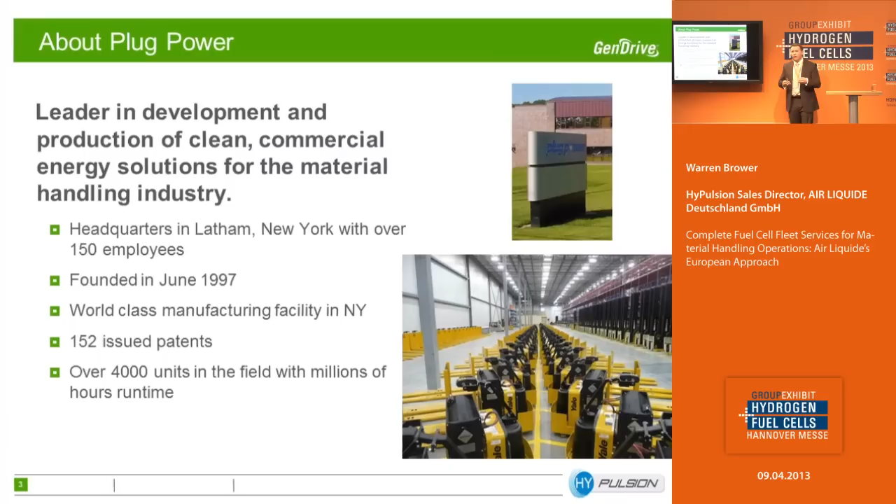Also, I want to make note, and I'm going to be stressing this throughout this presentation, and hopefully this is going to create some dialogue with us after the fact. But the products that I'm going to be talking about are not research and development products. And we've heard a lot about material handling, fuel cells within material handling, hydrogen to work in material handling field. But I'm going to be talking about actual commercial products that are in use. And there are over 4,000 of these products in use every single day with some of the largest companies in the world. And we've collected over 15 million operating hours on these products in the last couple of years. So what we're going to be talking about is actual products being used every day and the benefits that they bring to the customer base.

Air Liquide, again, most of you already know, in 2012, revenues just north of 15 billion euro. They're present in over 80 countries, over 50,000 employees. And their focus has been, as again, most of you know, and I'm not going to go into great detail on this, and please invite you to go to their booth at C56 and 58 to be able to speak to them a little bit more about this. But their focus in technology over the last couple of years and growing specific market segments has led them into this joint venture to work with Plug Power.

While in the U.S. and while working with Plug Power, I worked very closely with Air Liquide on several installations in large companies. So in March of last year, the two companies decided to come together, signed into existence HyPulsion, led by Luc Vendeval, who is the managing director. It's part of the Air Liquide group. Myself and Adrian Corliss came by way of the U.S.

with Plug Power on assignment over the next couple of years to get the joint venture established, as well as work with the lift truck manufacturers, the OEMs, understand the applications here. And over the past year, we've done a lot of the business development in and throughout Europe to understand exactly where the market segments are, where this product is going to work, how we can CE certify the products that are in existence, bring them to Europe, and start adding value to the operations here in Europe.

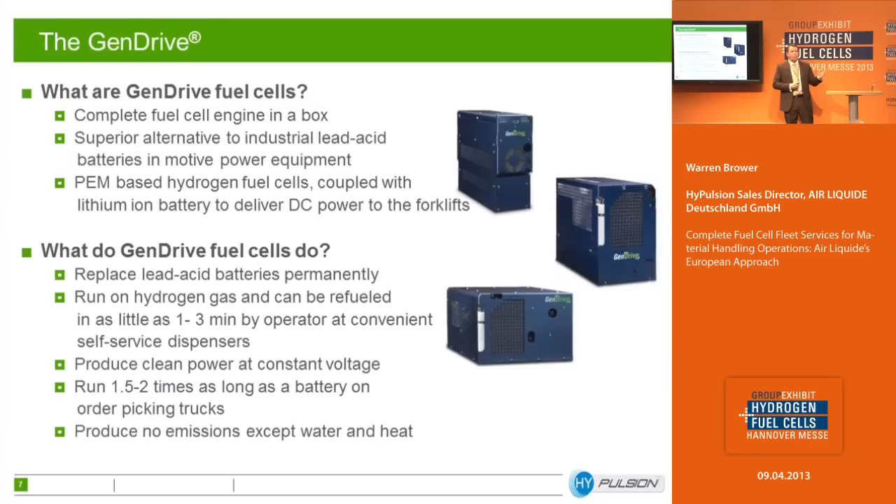They can be refueled, as most people already know and has been discussed in other forums, in as little as 1 minute, maximum of 3 minutes. This reduces a 10 to 20 minute battery swap and allows a customer to recapture the time and the labor associated with the handling of these batteries. The product itself, in many cases, can run 1.5, almost 2 times as long as an average lead acid battery, and has twice the life expectancy.

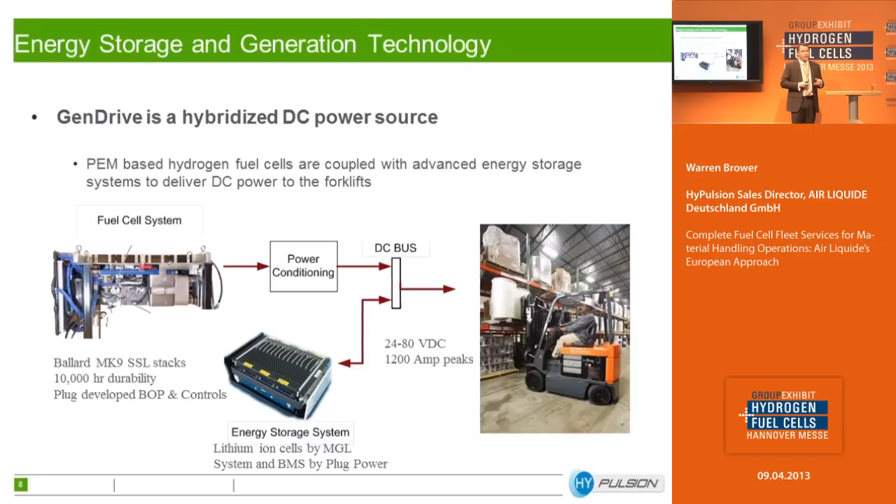Our GenDrive is a hybridized DC power source. So we use a Ballard fuel stack currently within our product, along with a lithium-ion power source or energy storage system. The reason why we do this is because it helps to maximize the output and performance of our product, because we work in very dynamic applications. But secondly, it also helps to dampen the overall load on each of the major components, so the life expectancy of these components is elongated. So you get the benefit of the power, and with the lithium-ion, you have a source to absorb any residual energy that comes back through the system, as well as make sure that the life expectancy of these components is elongated.

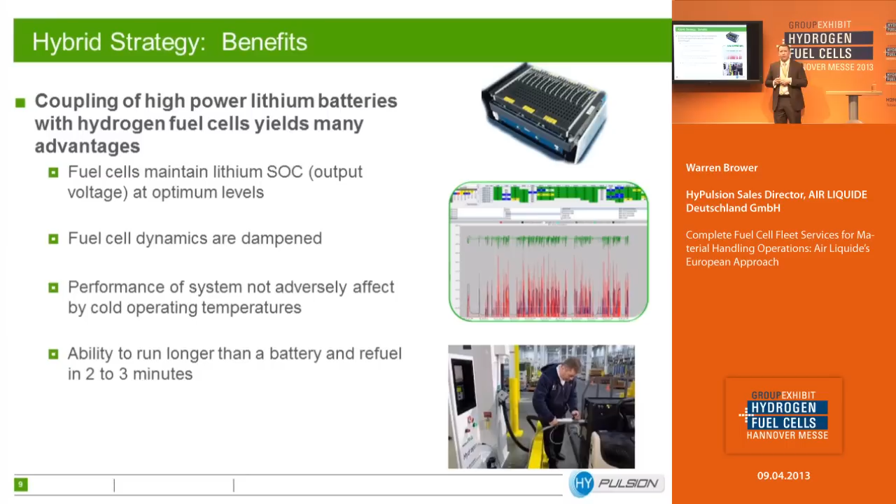We have a 2-system platform approach, a high power platform and a low power platform. Now the difference between them is there are many different trucks. If you are not familiar with material handling, it's too long of a topic to talk about today, but there are large counterbalance type products used in specific applications, narrow aisle reach trucks that can reach 30, 40 feet in the air. You have low-level order picking trucks, tugging applications, a wide variety.

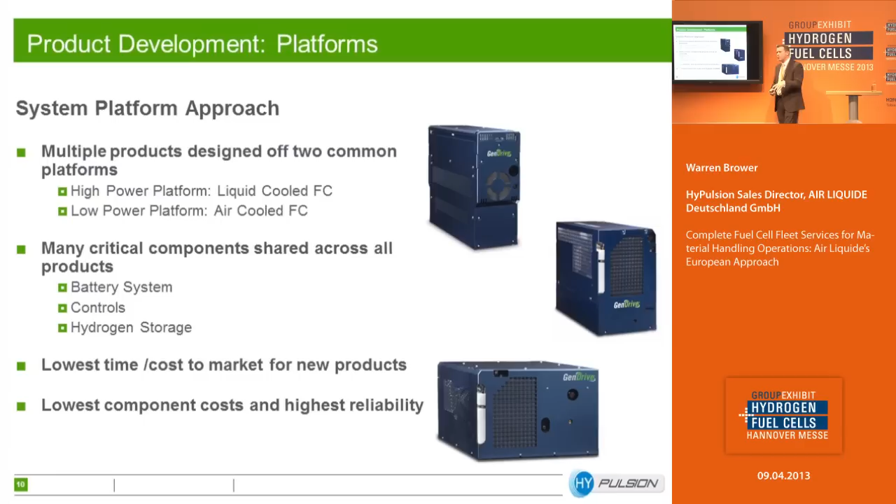So we have a couple of platforms that allow us to address these market needs and the power requirements, the weight requirements, and be able to share componentry across multiple lines. This helps drive costs of the product down and reliability of the product up. Essentially, for a high power platform, we have a unique or individual casting. Now this particular casting is very, very important for a couple of reasons. In these applications, these trucks are moving very heavy goods. So we need to make sure that all minimum weight requirements for the truck are met.

It's replacing a very large lead acid battery. Part of what that battery does is provide counterweight. The truck is tuned to a certain braking distance because of the weight that's in it. It needs a specific center of gravity. So this casting used within the system helps to address all of those needs. The second thing it does is it encapsulates the hydrogen storage vessel. So the tank itself, a high pressure 350 bar tank, sits inside this casting, providing additional support as well as protection to that vessel.

Then on the casting, we put basically the engine: fuel cell stack, water management, lithium-ion battery, air management, controllers, etc. Depending on what type of truck and what specific configuration it's going into, it is then married with the skins on the outside, which give you all of the necessary information: how much weight, making sure that it's going in the right truck, service dates, fueling protocol, etc.

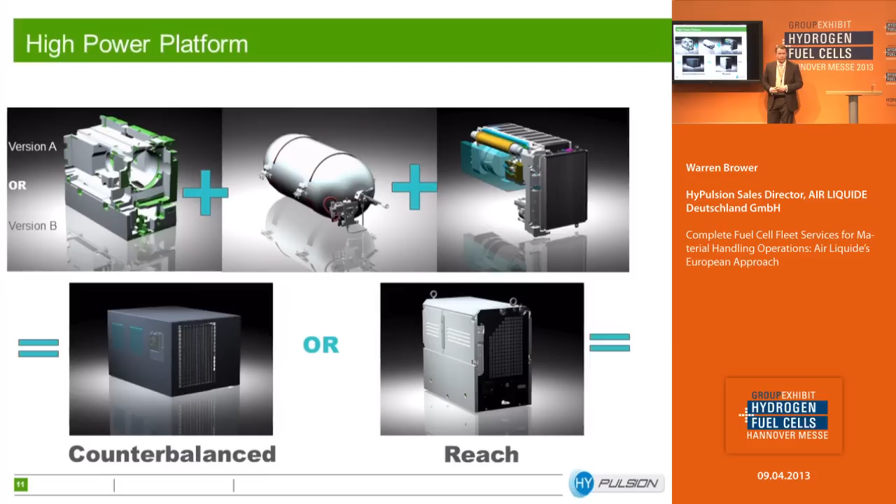On the low power platform, again, we have multiple looks at this and multiple configurations. Because the applications themselves are so dynamic, we need to be able to address what's referred to as a low-level order picking or a stop-go lighter application, or a heavy, high-throughput tugging application, as you see in heavy manufacturing.

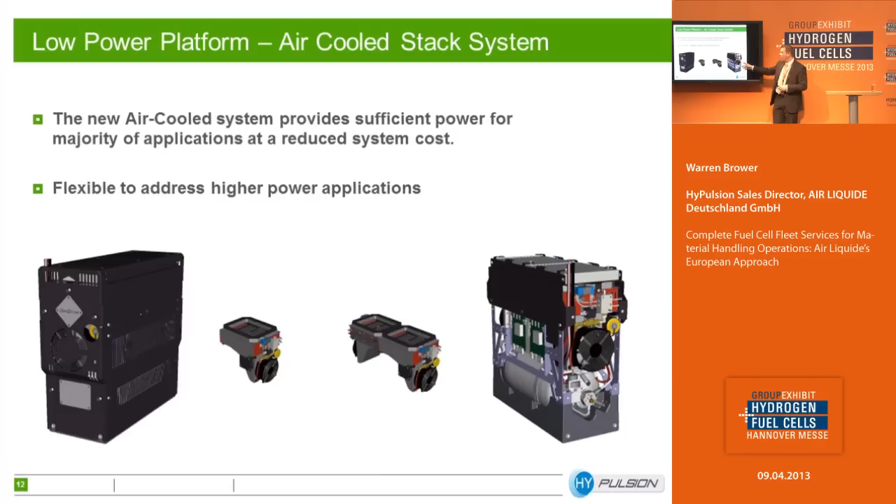So we have a single or a dual power module approach. Single module, obviously, an air-cooled stack, goes into the system. The system is used for a stop-go lighter application. But then there's the flexibility to add a second stack, even to an existing product, when used in a larger or more dynamic application.

So what does this mean from a commercial standpoint? Now, again, as I mentioned, and I'll mention again, there are thousands of these units in use every day in other parts of the world. What we've done is we've taken a look at the requirements here in Europe and UK. We need CE certification. We need to meet certain requirements. The trucks are a bit different. The applications are a bit different.

This past year, we've released several configurations of product that are currently being demonstrated and qualified by our OEM partners. And we have a vision of the roadmap over the next several months. By the end of this year, we'll have over 9 products with multiple configurations of each product to be able to offer into a real world, real environment to real customers. Anything from, as I mentioned, low-level order picking, small truck, ride-on product, all the way up to large 80-volt high-power product capable of lifting several tons.

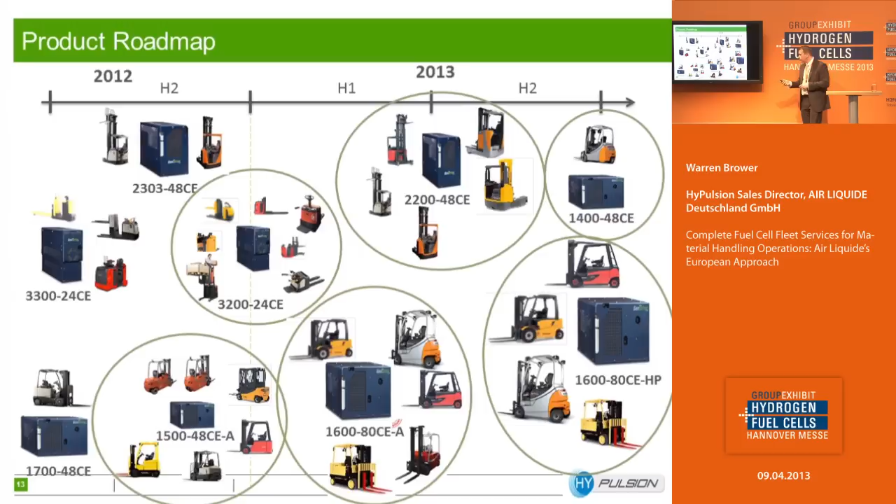So the benefits. Where do we look? What benefit does a product like this bring from a commercial standpoint? Earlier today and throughout this show, I've been listening to a lot of the discussions around fuel cell and hydrogen in material handling and other market segments. But the reality is there are multiple segments within material handling that have a very good value proposition, make very good business sense. We all eat, we all go to grocery stores, high throughput food distribution, grocery stores.

So we go in, we want to make sure that the products are on the shelves. Well, how do they get on the shelves? Each of these supermarkets have large distribution centers that help to support them to ensure that at any time you have food on the shelf. So in these distribution centers, generally there's 100 to 300 trucks in a captive audience in one facility that are running, if not 24 hours a day, usually close to 24 hours a day, made up of high-level reach, order-picking trucks. These distribution centers have high labor costs, high energy costs, and as I mentioned, often run 2 to 3 shifts a day.

Now, if it takes you 10 minutes to change a battery and 3 minutes to refuel a fuel cell, the recapture of that labor cost, you take that, you multiply by 100 people twice a day, annualize that number, and add to it a 20, 25 euro an hour labor rate. And if you're responsible for this application, you could have unproductive time equaling 20 to 30,000 man hours a year, unaccounted for. So the recapture of that time is a big value add to these customers.

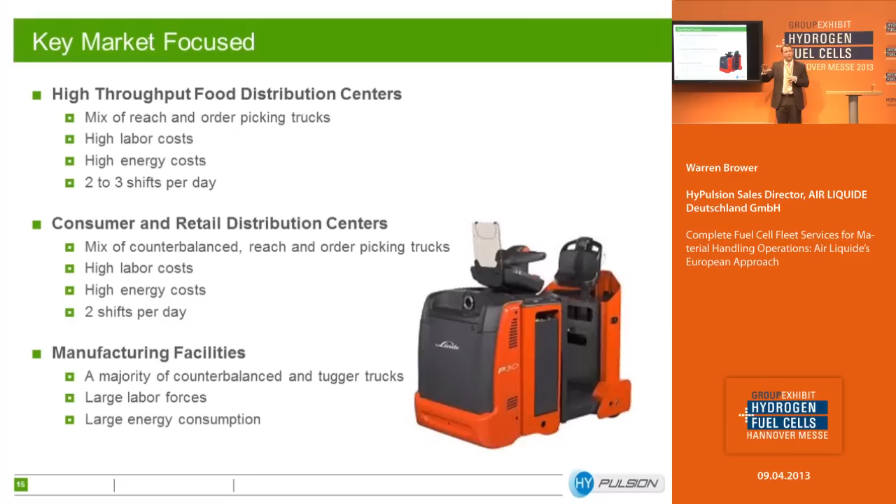Now, one of the benefits that this brings is there is no deterioration in the performance of the trucks. We all know from using an electric drill or anything electric, if we're using a battery, the more we use it, eventually the battery begins to deplete and the performance of that product begins to slow or get worse. We either have to change the battery or we have to sit and wait for that battery to charge. What this product does is it provides constant voltage and constant performance as long as it has gaseous hydrogen within it.

So what do we bring? We bring about increased productivity. So again, the truck never slows down. It only takes a couple minutes to refill. As you'll see in a couple slides, the hydrogen dispensing is done indoors in a convenient location and actually becomes part of the process flow. No more driving across a huge warehouse to wait in line to change a battery. We eliminate queuing, we eliminate the need to travel great distances to change the batteries, and the product is filled in a matter of a few minutes.

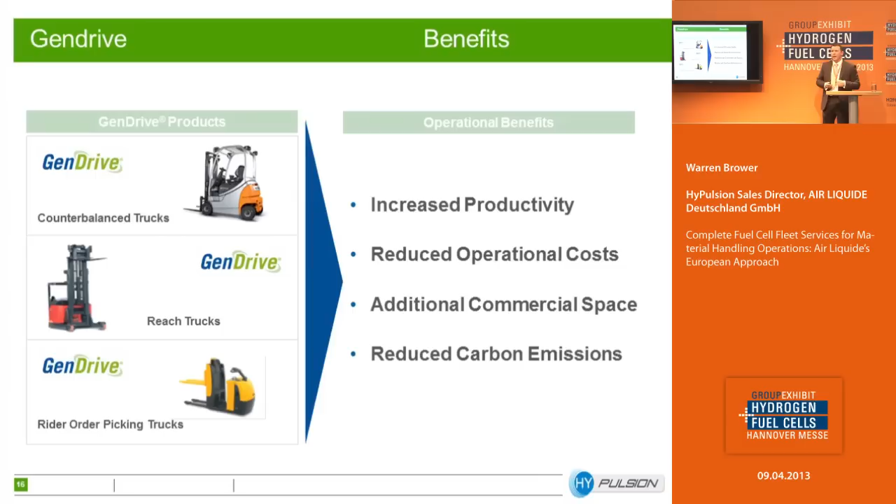So we increase the productivity. We reduce operational costs. We add additional commercial space. The battery room to serve an entire fleet can be larger than the room we're in right now, housing batteries that 2/3 of the day are simply sitting in rack. And of course, we reduce carbon emissions. In certain parts of Europe and certain parts of the world, this takes on a much greater meaning and a much greater message to the customers who are using this technology.

So we have a four-pronged approach. We look at what we can do with each customer. And as mentioned at other forums earlier, it is very true. This is application-specific and customer-specific. This is not going to work everywhere, but today it works in specific environments.

So how can we increase their productivity? What can we do to look at their application and find ways to get them savings? How do we reduce their operational expense? How do we increase their commercial efficiency and environmental benefits? These are the things that this product brings.

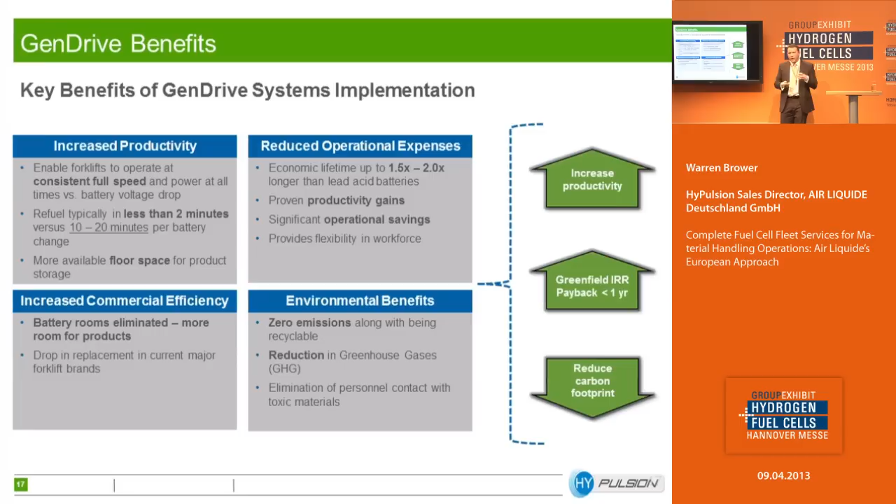It's a technology-driven solution. So we sit with each one of our customers, and this process has been vetted hundreds of times. An example, and I want everyone to know that these numbers I made up a couple of days ago, they mean nothing, but the idea behind what we do from an economic standpoint is we take a look at, first, what is their application?

You use lead-acid batteries, how many trucks do you use, how much is it costing you, what is your labor rate, and we look at the application to find out, first of all, will it make sense for this customer or will it not? If it doesn't make sense for the customer, we refocus on where it does. Because again, this is something that we are not forcing into the marketplace, it's being absorbed by the marketplace because it makes financial sense to them.

We take a look at where are the big adders, where do they need to focus in their current application. Generally speaking, it's around the actual management, the people who are actually moving the goods. How can we make them more efficient so we can recapture their time? Then we take a look at, from there, what does it mean by implementing fuel cells? What will fuel cells and hydrogen do for your application in the exact same application, and will it yield an annual savings?

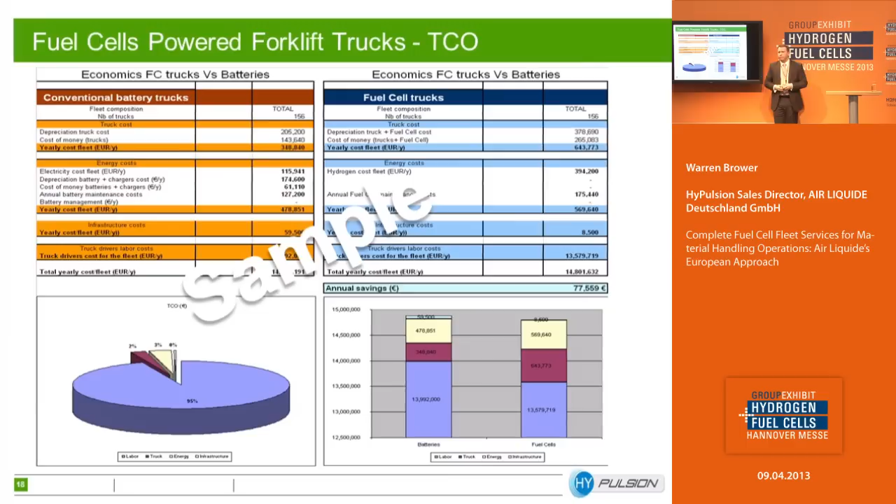Now you notice here, basically what this is going to show is the fact that at times it will be more expensive from a capital standpoint to implement a new technology. We're all aware of this. It would be more expensive to use hydrogen than electricity in many cases. We're aware of this as well. But the overall cost of ownership is reduced through the productivity gains that the product brings. So we look at these customers, we look at their organization, we look at their application, and figure out how to find that for them.

From a hydrogen standpoint, again, you can see this throughout the show, and again, I invite you to go take a look at some of this. Hydrogen infrastructure sits outside the building. Hydrogen is never stored inside the building. It is extremely safe. It is then piped into the building to a convenient location, part of the process flow, part of the workflow for these companies, where an operator himself, not a dedicated person who's working in a room handling batteries, pulls up and in a matter of 3 minutes dispenses the hydrogen and is back in the workflow.

Large facilities can put multiple dispensing systems in place, so it eliminates the need for queuing and it eliminates the need for travel across a large facility. We have a 3-step process, very simple. First thing that's connected is a data cable. The data cable does 3 things. Collects data. We have over 15 million hours of runtime operating data that we use on a daily basis to ensure the reliability of these products. It also prevents drive-away, so an operator can't jump back on the truck and drive away with hoses and connectors connected to it. And it also serves as a grounding device.

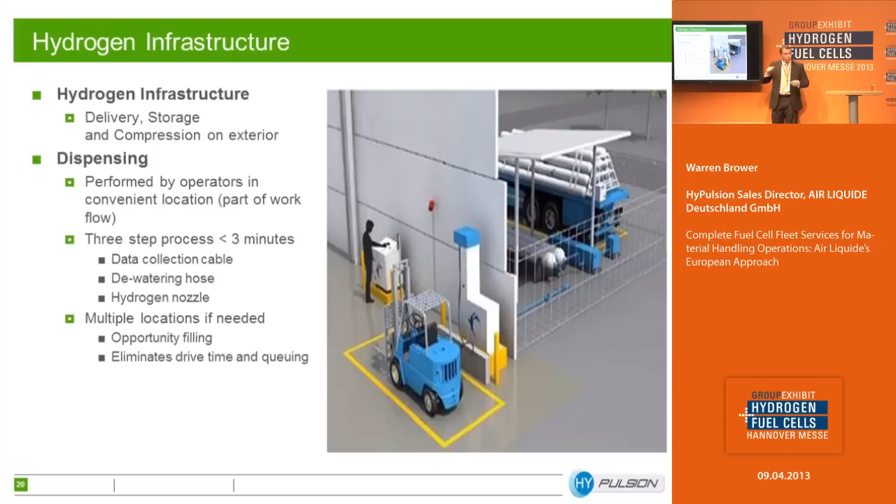A dewatering hose, because, I didn't get into it here, but a PEM fuel cell based product creates water during the process. We capture the water on board, and the water is then siphoned off during the refueling process. Hydrogen nozzle is attached. The hose then dispenses hydrogen. Once the hydrogen is done, it depressurizes, goes back outside. Remove the hose, 3-step process, you're back. The entire process takes about 3 minutes.

As mentioned several times, and I'm going to mention again, over 15 million hours of runtime, which is gathered on every single unit that's in operation all over the globe. We have, right now in North America, about 42 customers working over 4,000 units on a daily basis. Most of them are 24-hour-a-day operations. We average just over 8,000 fills per day.

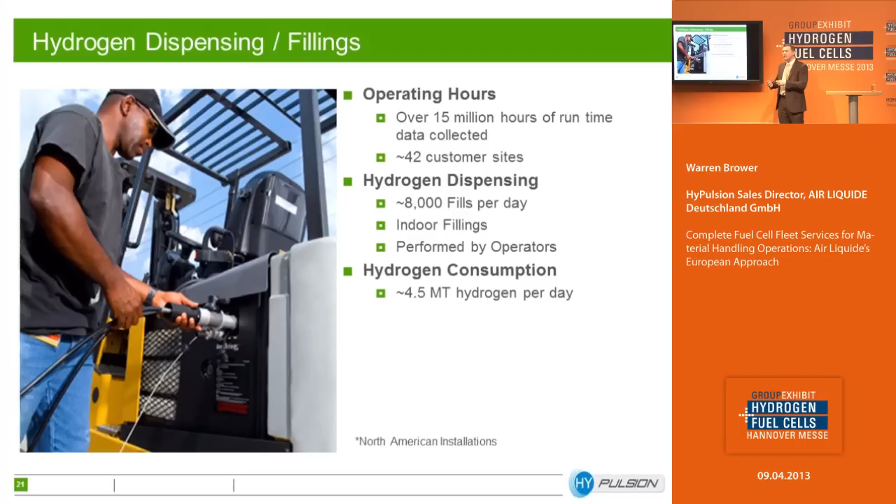So the use of hydrogen in fuel cells happens over 8,000 times every single day. The equivalent of over 4.5 metric tons of hydrogen is consumed every day in everyday activities and everyday applications with some of the largest customers and companies in the world. So again, this is not a vision, this is a reality.

The results. The results here in North America, some of these names you're going to know, some of you are not. BMW, Walmart, Sysco Foods, which is the largest industrial food provider in North America, Whole Foods, Procter & Gamble, Stihl, CVS Pharmacy, Mercedes-Benz. These customers, we know these companies, and these companies have embraced this technology and are using this technology.

Now, my very last slide I want to point out, it may be difficult for you to see up here, but it's not just that these customers trialed these products. It's not that they just thought the economics were interesting. We vetted the economics with each and every one of these customers to ensure that it made business sense for them. But these customers have deployed and redeployed in multiple locations. 3 different Walmarts, 10 different Sysco Foods. We're about to do a few more Krogers, Bridgestone, two different facilities, Procter & Gamble, 3.

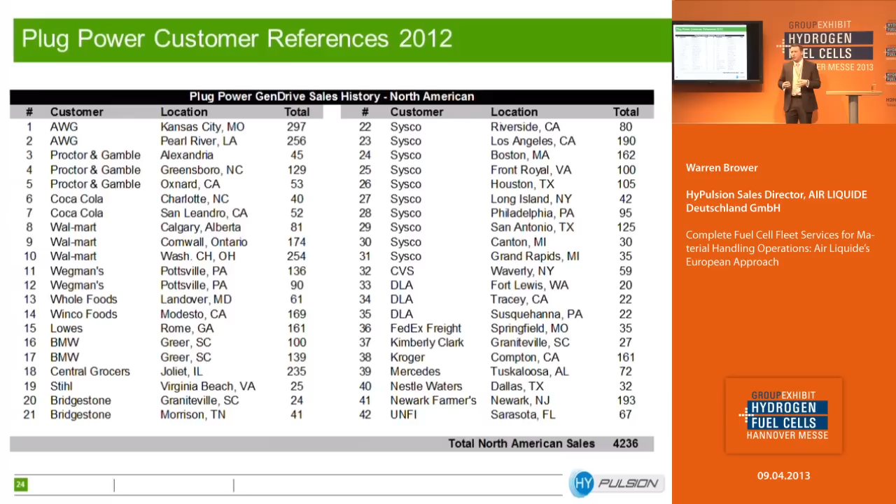So we delivered on the product, delivered on the promise, showed an economic return, showed that it was a safe product, brought about productivity, reliability, and good service. And it made a difference to these companies to the point that they've invested and reinvested and continue to deploy these products. So that's the last slide I have.